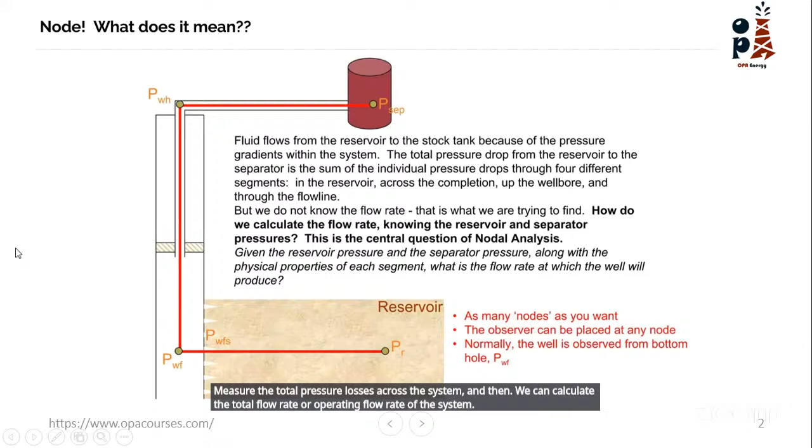So we should divide these segments in order to be able to solve our problem and calculate the total pressure losses across the system, and then we can calculate the total flow rate or operating flow rate of the system. So basically, we should first start with the inflow performance relationship.

The inflow performance relationship represents the pressure losses across the reservoir, starting from the reservoir to the sand face or the completion. The simple equation for solving the inflow performance relationship is the Darcy equation: flow rate equals J multiplied by delta P, or the drawdown. The drawdown is the reservoir pressure minus the bottom hole flowing pressure.

And J, of course, is the productivity index, and it depends on a lot of factors like formation permeability, skin factor, wellbore radius and drainage radius, the viscosity of the fluid you are flowing, and the net pay thickness.

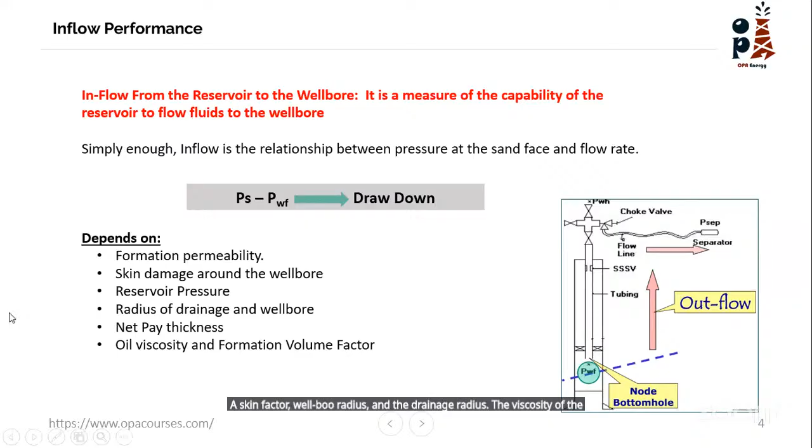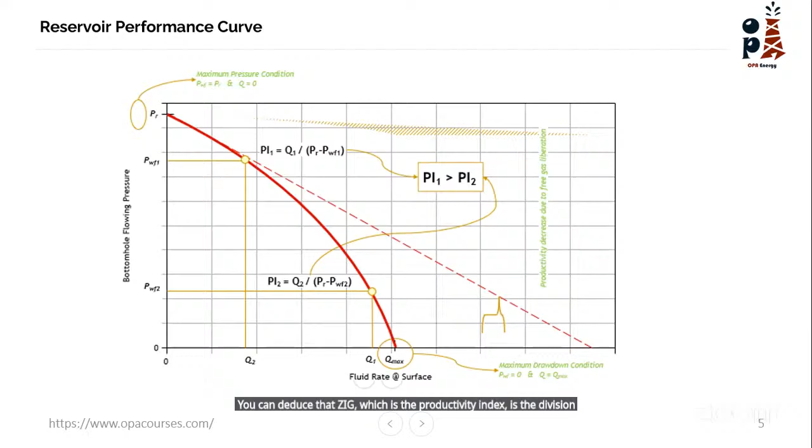And from this graph, using the normal equation of the straight line IPR, you can deduce that J, the productivity index, is -1 divided by the slope of this curve.

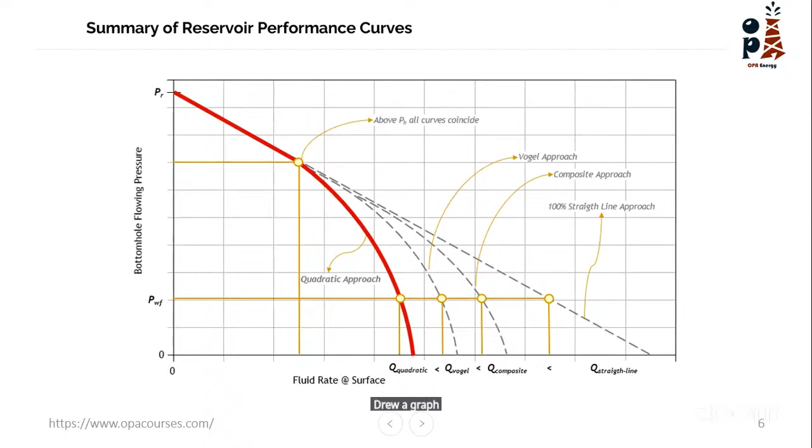These are different kinds of inflow performance relationship depending on the fluid you are producing: whether it is water, single phase or two phase, whether you are producing gas or not, whether you are above the bubble point pressure of the fluid or below it. So depending on all of that, you can draw a chart for your inflow performance relationship. And this is a chart showing you when to use different kinds of IPR method, and I can share it with you after this webinar.

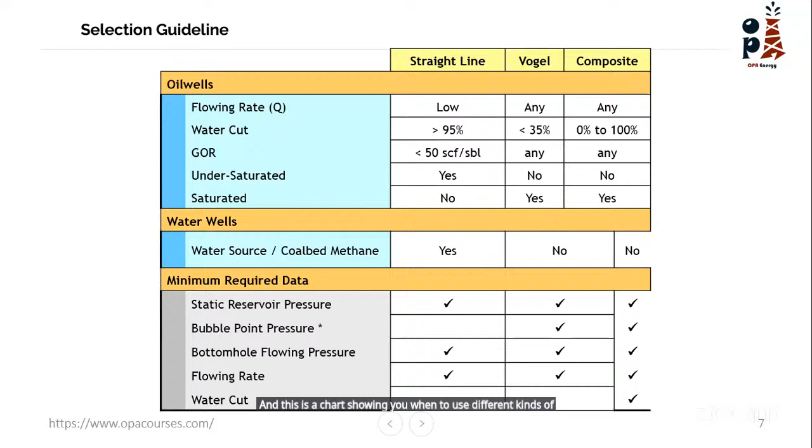Moving to the second segment of our webinar, which is the vertical lift performance or outflow performance. It represents basically the flow starting from the PWF point up to the wellhead or up to the separator, depending on the end of the branch you are simulating against.

And as you know, there are different kinds of flow regimes when you are producing single phase or multi-phase fluid, because we normally don't produce oil only, but we produce water accompanying oil and some gases when flowing below the bubble point pressure.

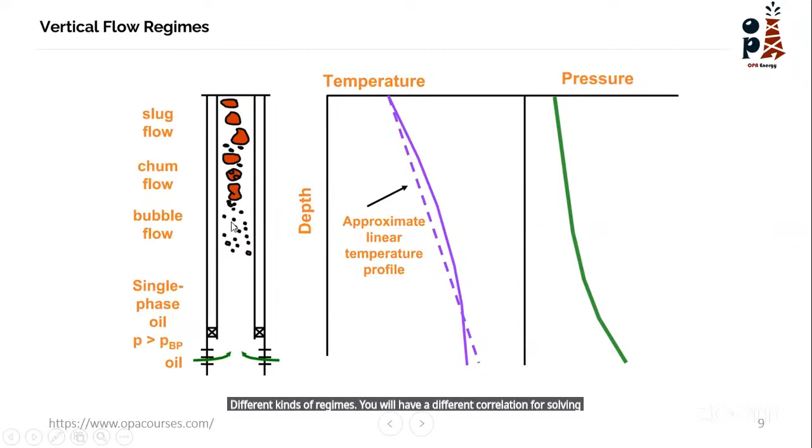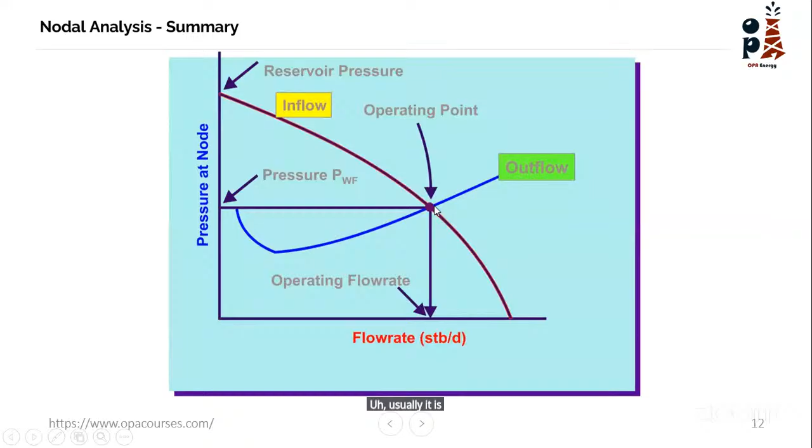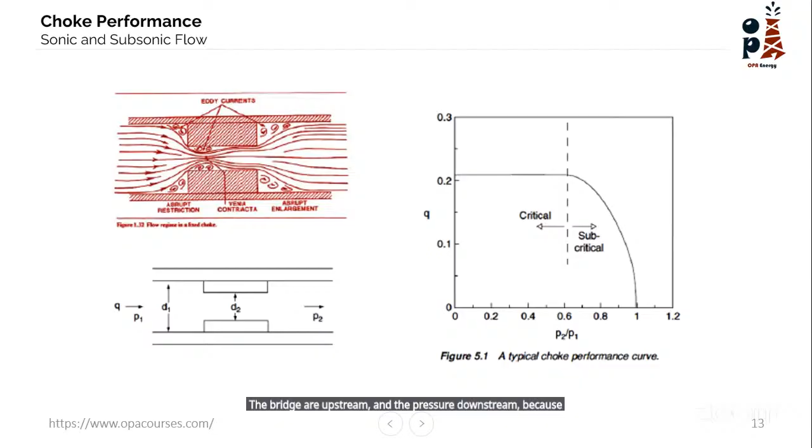This also is the choke performance. As I told you, you can choose your endpoint as the wellhead, or choose your endpoint as the separator or the downstream point. In this case, there is another node which is the choke, after which and before which there is a difference between the flow rates and the pressure upstream and the pressure downstream, because major pressure losses happen across this choke.

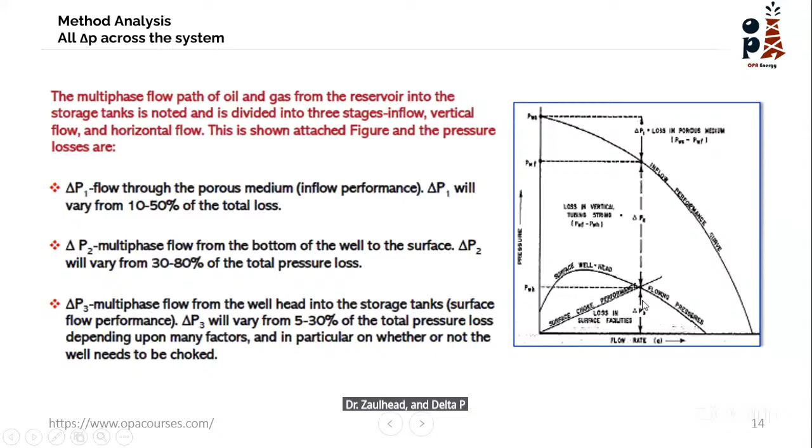So this is the total graph that represents the system you are producing at. Delta P1 is representing the pressure losses across the reservoir. Delta P2 represents the pressure losses across the tubing and up to the wellhead. And delta P3 represents the pressure losses up to the separator.

Okay, let's have a look now at Prosper and see how we can model a basic oil well. Okay, let's open Prosper. This is a portable version of Prosper. Everyone can use it at any time without installing or setting it up on the PC. Having a look first on Prosper, we have 6 main...

Excuse me, Engineer Omar. Sorry, I didn't share this screen. I will be sharing it right now. Okay, no problem. Take your time. Okay. Now everyone can see the screen of Prosper.

Yes. Okay. Having a quick look on Prosper, we have 6 main windows. The upper left one representing the option summary or the intro of your well. To the right, there is a PVT input data, and the upper right one is the IPR data. Below here is the equipment data, and to the right, this is the analysis summary, and this lower right one is an intro or some information about your Prosper version. We usually don't use this. We just use these 5 windows.

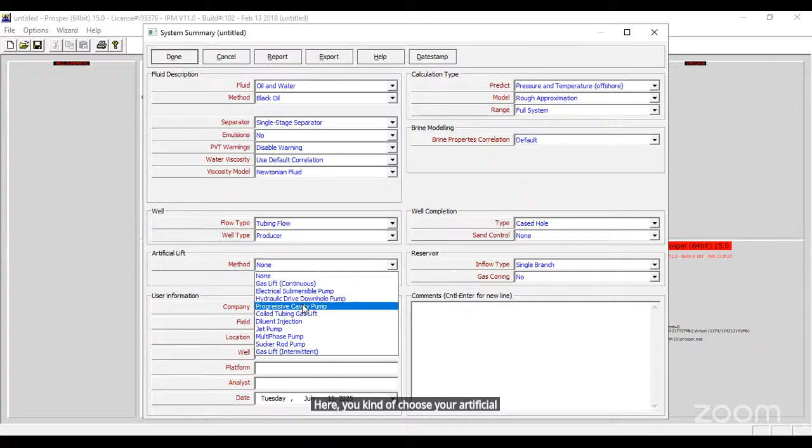Our separator, we have just a single stage separator. Emulsion, no. The viscosity model is Newtonian fluid, not non-Newtonian fluid. About the data of the well, you are flowing through the tubing, annulus, or tubing and annulus. Usually we are producing through the tubing. The well type is producer, injector, or coal bed methane producer. We are simulating a producer well. Artificial lift, here you can choose your artificial lift method, but in our case, we are going to use none, as we are going to simulate a natural flow well.

Calculation type, we are simulating offshore well or onshore well. Let's choose on land or onshore well. The model will be rough approximation. We are not including or involving enthalpy balance inside our simulation. We are simulating the full system, of course, starting from the reservoir up to the separator. Let's keep the brine modeling as default.

Well completion, here you can choose your completion. You are producing through a cased hole well or an open hole section. We are producing, in our case, through a cased hole section. The reservoir, you are producing from a single branch or multilateral well. In our case, we are producing through just a single branch. No gas coning is involved in our simulation.

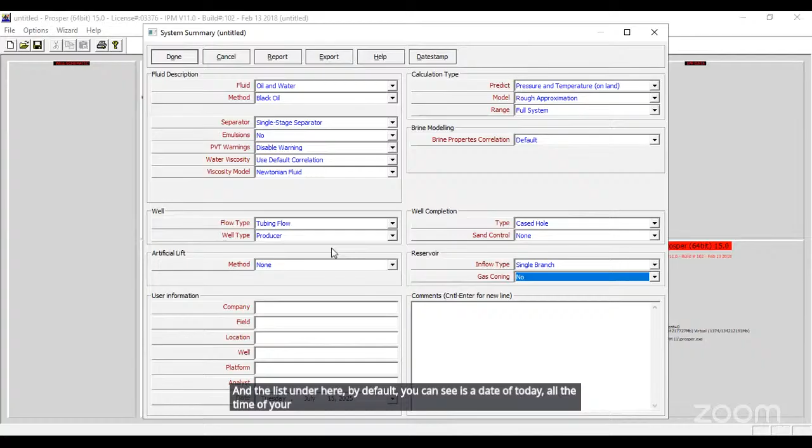If you are going to export a report about this model, you can enter your user information here, your company, field, location, well, and your name as an analyst. And here, by default, you can see the date of today or the time of your modeling. After entering all this data, you can click on Done.

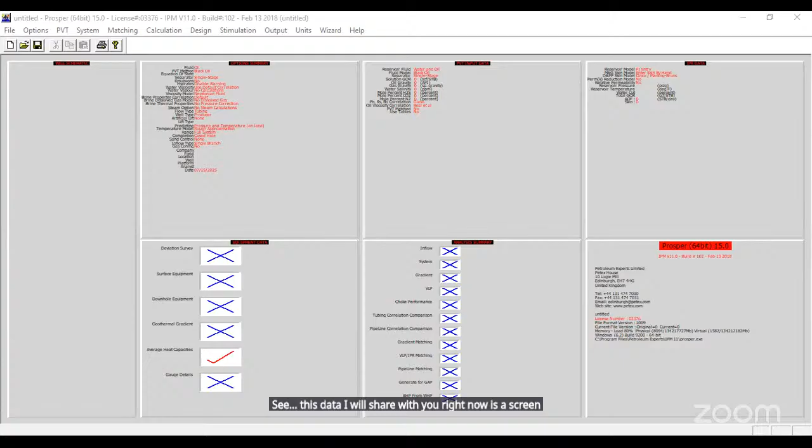Okay, I usually prefer to go to this equipment section as it shows in front of you right now. Let's double click on the equipment data. And before going through this, I have some input data to share with you. I will open an Excel sheet of an actual well. Let's see this data. I will share with you right now the screen of the Excel file in which the data of this basic well model is represented. Okay.

Have a look now on this sheet of the well model that we are going to simulate. Here is the survey of the well. This is the PVT data: the GOR, the oil gravity, the gas gravity, and the water salinity. This is the IPR data: the type of the calculations you are going to choose, the productivity index, reservoir pressure, reservoir temperature, water cut, and total GOR.

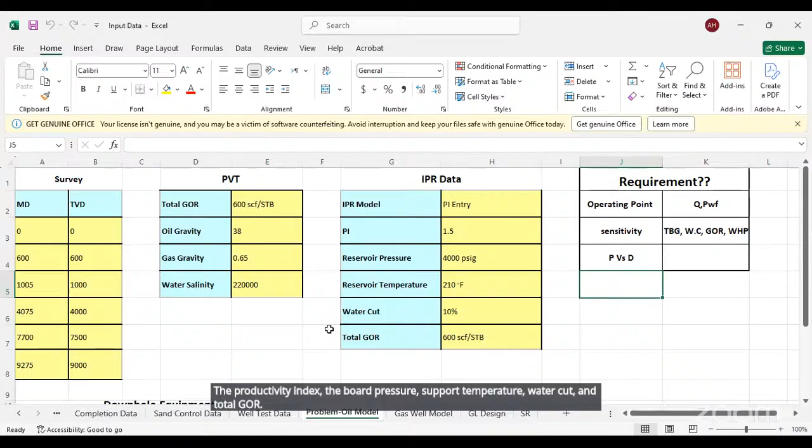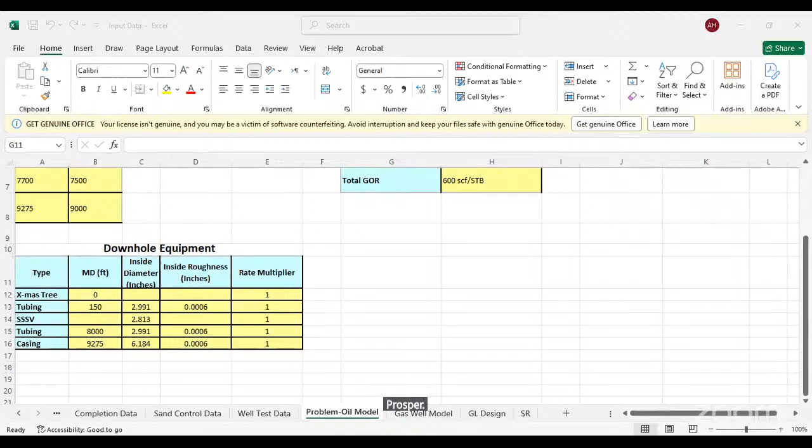And this is the downhole equipment, number of tubulars you are using, and the casing size. So let's first go step by step to our model. I will return back to Prosper. Okay, if you double click on equipment data, here you have 6 sections below the equipment data. First of all is the deviation survey.

Click on this square shape beside it. It will open for you this window in which you can enter your data, and you can realize that we have just 20 rows for entering the data. If you have a lot of rows inside your survey, you can use this filter button at which you can enter all the survey data and filter on it for the program to choose just the 20 points to represent your well.

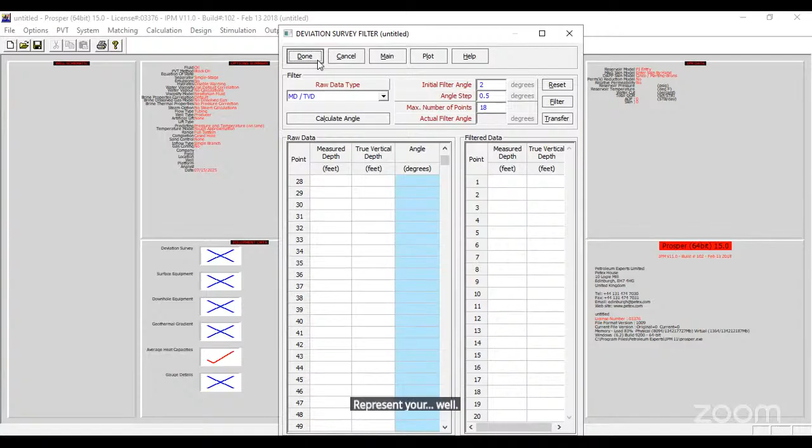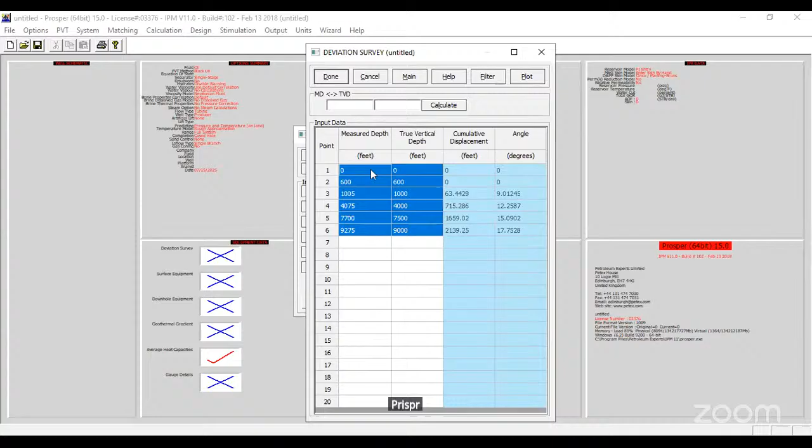But in our case, we have lower than 20 rows. I will take them from the Excel sheet you have just had a look on. I will copy and paste the cells inside Prosper, and then you can realize that the program calculated the angle and the displacement of the well. After that, you can click on Done. Here you have entered the deviation survey.

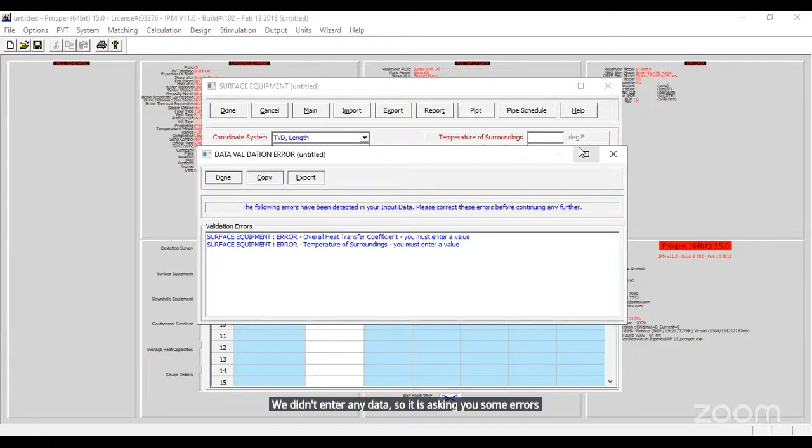The second one is the surface equipment. In our case, we will be simulating a well at the wellhead. We don't use right now a choke. We don't need to make choke performance right now. So this section we will skip for now. We didn't enter any data, so it is giving you some errors: you didn't enter the data. So we will click on Done, and then cancel.

Okay, let's go to the downhole equipment. Here you are starting from the Christmas tree. Depth is 0. From this drop down list you can choose. We have a tubing at 150, and its inside diameter is a 3 1/2 tubing. So this measured depth is 150, and its inside diameter is the inside diameter of the 3 1/2 inch tubing, which is 2.99. And the tubing inside roughness is by default.

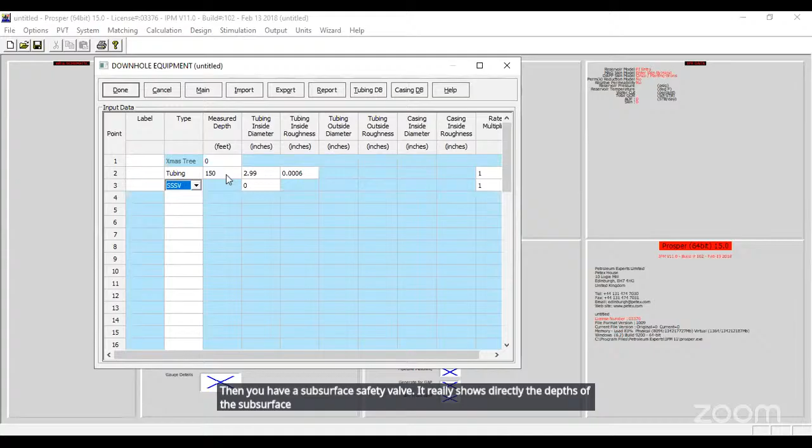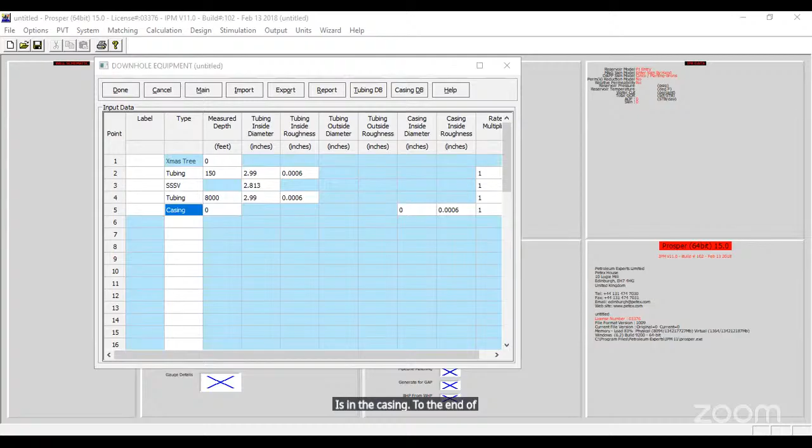Then you have a subsurface safety valve. It will choose directly the depth of the subsurface valve as the end of this tubing. Its inside diameter would be 2.813 inch. After that, we have still tubing to 8,000 feet, and its inside diameter is still the same, 2.99. Then the casing to the end of the well, which we have entered inside the deviation survey, which was 9,275.

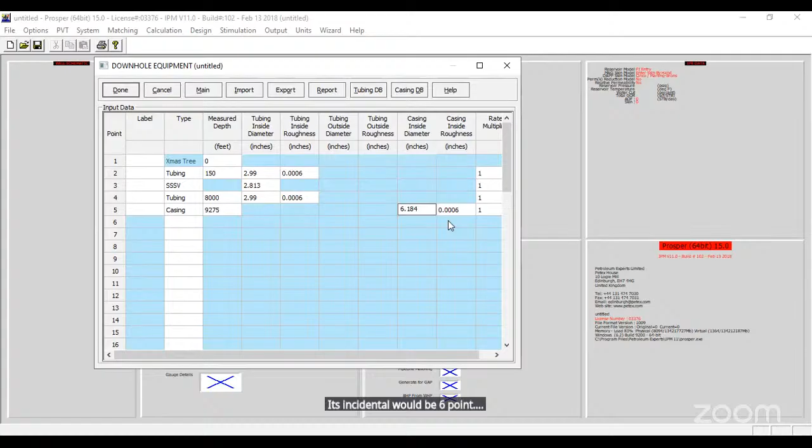It will be asking you the inside diameter of the casing, and let's assume it is a 7-inch casing, so its inside diameter would be 6.184. Now we have entered all the data regarding the downhole equipment. Let's click done.

Going to the geothermal gradient. Now we should enter the geothermal gradient, the tubing head temperature or the surface temperature. Let's choose at surface, at zero measured depth, your temperature will be 60 degrees Fahrenheit, and then at the end...

Excuse me, John. Sorry for interrupting you, but if you could share the Excel in the Zoom chat right now, because some people are asking for it so that they can practice with you, it would be perfect. If it's not ready now, it's okay, we can share it after the webinar. Okay, I can share it through the chat. Yes, Zoom chat. Okay, I will take it right now. Just a few seconds, I will be sharing with you. Okay, now it is shared in your chat. Anyone can open it. Yes, we received it. Thank you.

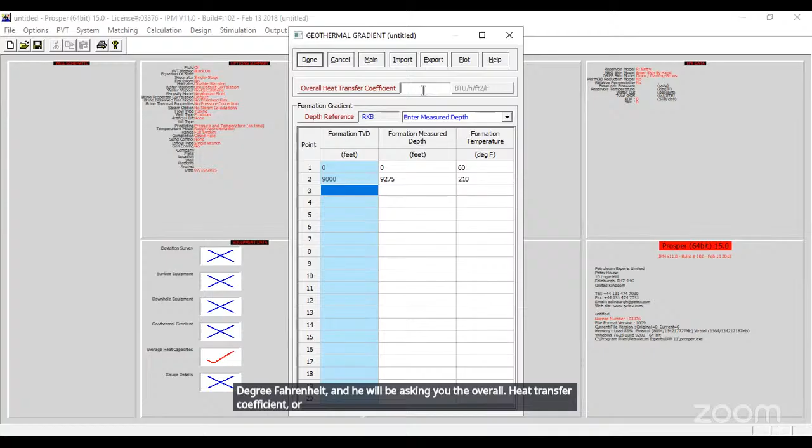Okay, thank you. Let's move back to the geothermal gradient. At zero depth we have 60 degrees Fahrenheit; at the depth of the casing or the reservoir depth it is 210 degrees Fahrenheit, and it will be asking you the overall heat transfer coefficient, or U in other softwares. Usually with oil models, we choose it to be 8, and then you can click on done after you have entered the geothermal gradient. Average heat capacities here are entered by default inside Prosper, and we'll click done.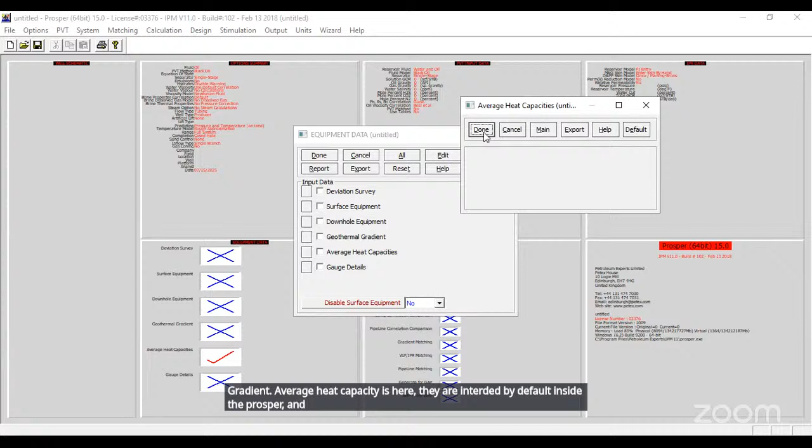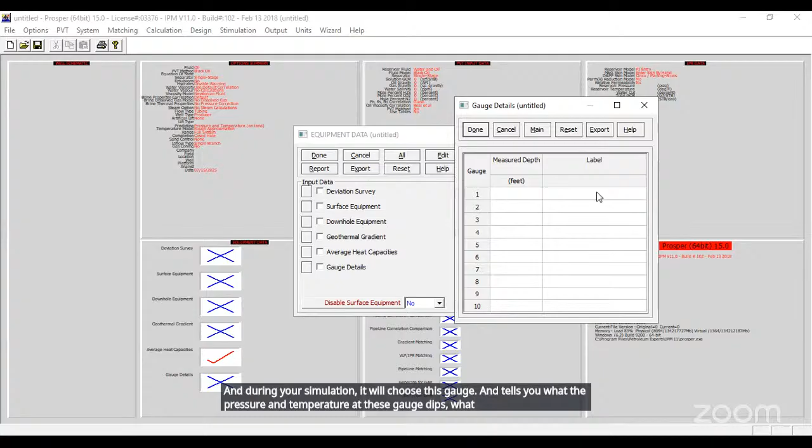Gauge details: this section is for if you are using a gauge inside your completion and you know its measured depth. It will put a label on this gauge, and during your simulation it will tell you what the pressure and temperature are at this gauge depth. So it will be a label for you. Usually we use this for matching cases between the actual wells and the Prosper simulation.

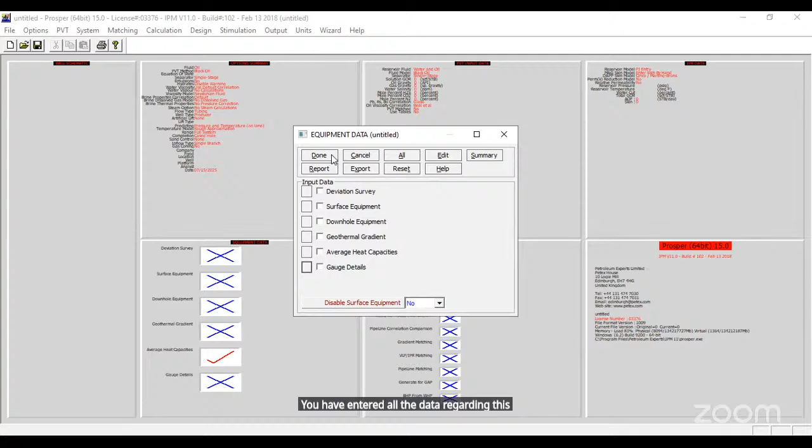So in this case, we don't have a gauge right now, so we will click on done. You have entered all the data regarding this equipment data. After that, you can click on done.

From the data I have, it shows the solution gas oil ratio, or the total gas oil ratio inside this well or this reservoir, will be 600. The oil gravity is 38 API degrees. And the gas gravity is 0.65. The water salinity is 230,000. We don't have any H2S, CO2, or N2.

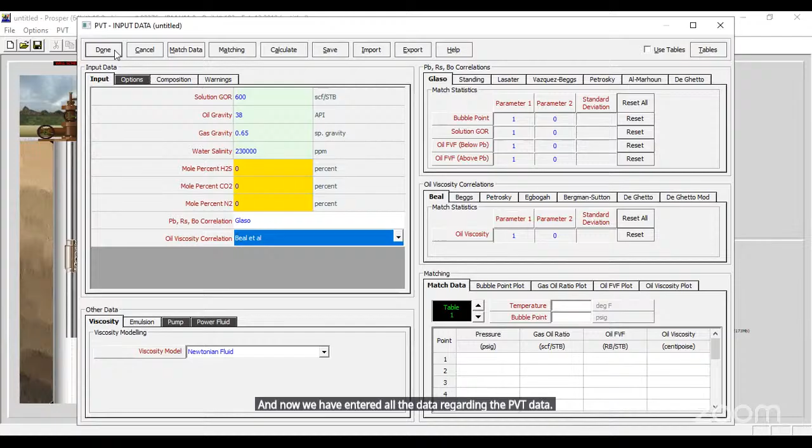Let's keep the default correlation that the software is using for calculating the bubble point and the viscosity. And now we have entered all the data regarding the PVT data. Now we can click on done. Now the PVT data is entered, and let's move now to the IPR section.

Here to the left, you can choose whatever correlation you need to use to solve your model. PI entry: if you know the productivity index of the well, you can enter the productivity index directly. Using Vogel will show you another window. Here, the software needs a test rate and a bottom hole pressure.

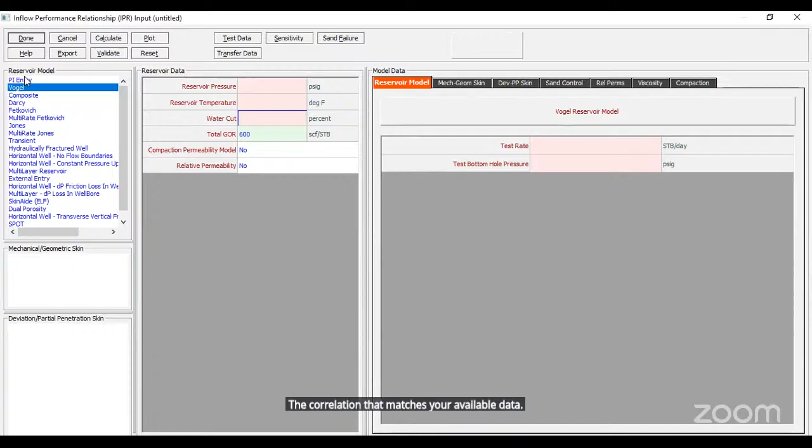And of course, all these correlations depend on many factors. First of all, the reservoir you are producing. And secondly, the available data with you. You should choose the correlation that matches your available data. Let's choose in our case the PI entry model because we know the productivity index, which from the Excel sheet is 1.5.

The reservoir pressure was 4,000 psi, temperature 210 degrees Fahrenheit, and water cut, let's assume the water cut is 10%. The total GOR is by default taken from the PVT data. Here the program has understood the total GOR and just taken it from the PVT data. Okay, now we are ready with the IPR data.

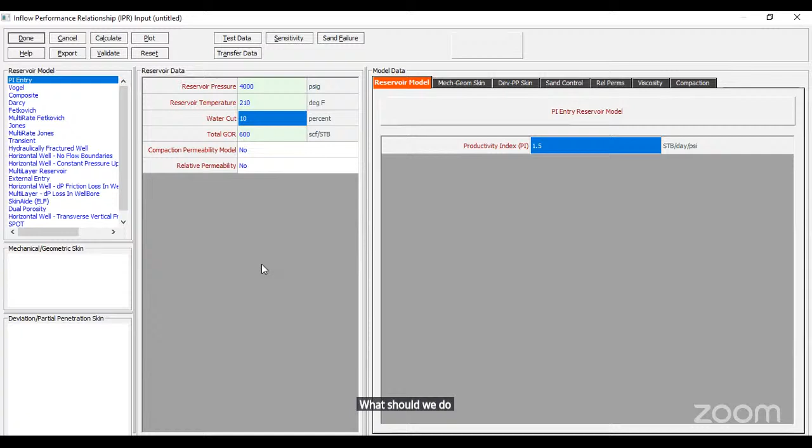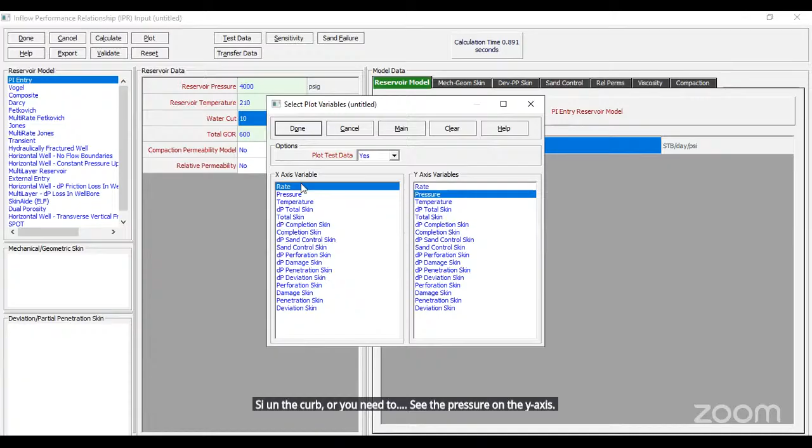What should we do now? We should now calculate the IPR data and see the inflow performance relationship. Now we should click on calculate. Clicking on calculate, it will calculate for you the IPR curve for the well. Let's click on plot results to see the shape of the IPR. It will ask you what you want to see on the curve. I need to see the pressure on the y-axis, and on the x-axis I need to see the flow rate. And then click on done.

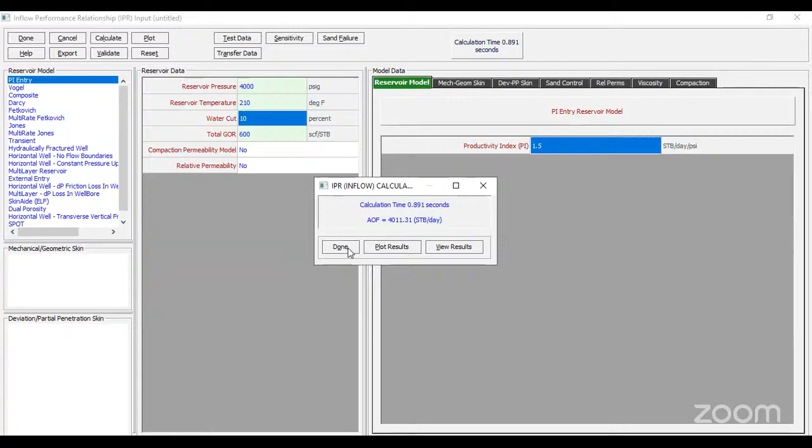Okay. Now, of course, the intercept with the y-axis is the reservoir pressure, as we all know. If you are producing at zero flow rate, the PWF is equal to the reservoir pressure, which is 4,000 psi in our case. Okay, let's click on finish and done. Okay, done.

You can see that your IPR curve right now is represented on this right window. Okay, what we have done till now: we have entered the options summary, we have entered the PVT data, we have entered the equipment data, and we have entered the IPR data and drawn the IPR curve. Now we need to simulate the vertical lift performance and do some sensitivity analysis on the system to know how the well will be flowing with different cases.

So let's go to calculations, system IPR plus VLP, and click on it. Okay, here it has opened this window and the software will be asking you, you need to produce this well. So I will simulate for you what is the flow rate you are going to produce and what is the PWF or solution node pressure you will be producing with.

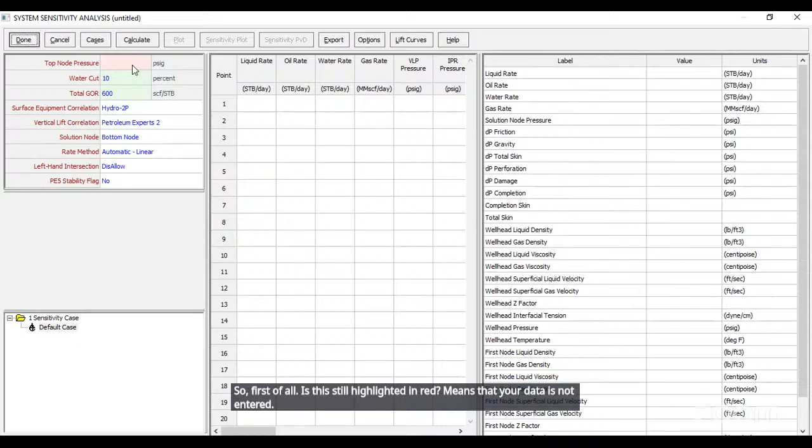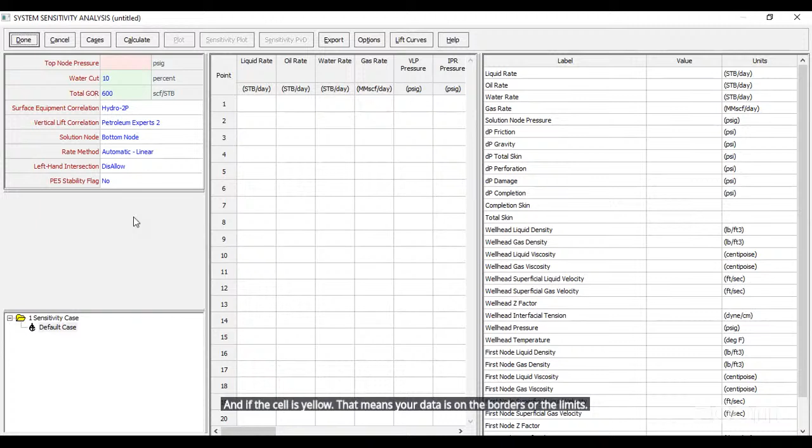So first of all, this cell highlighted in red means that your data is not entered or your data is not correct. But if they are green like this, your data is correct. And if the cell is yellow, that means your data is on the borders or the limits. So what is the wellhead pressure or top node pressure you will be producing with? For example, if your network pressure is 500 psi, the wellhead pressure for your well will be 500 psi, and let's enter this. And now we are ready to draw the VLP against the IPR.

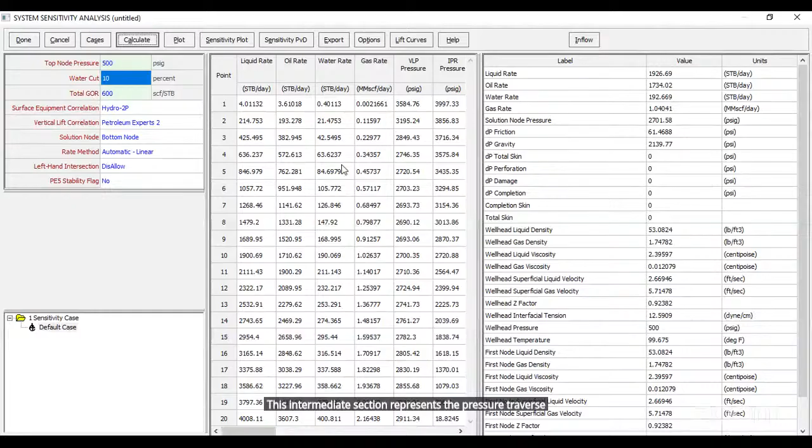Just click on calculate, show calculating data, and then the program has just calculated for you the VLP against the IPR. This intermediate section represents the pressure traverse across the different depths, different liquid rates, and the gas rate from the well, water rate, and all these data.

To the right, this is the solution point: the liquid rate you can produce from this well is around 1,900 stock tank barrels per day. The oil will be 1,700 because the water rate we have entered is 10%. The gas rate is around 1 million. The solution node pressure represents the bottom hole flowing pressure.

And I forgot to tell you something here. The program is asking you what correlations you are going to use. So in VLP, we can choose among various kinds of correlations based on your offset wells and based on the matching you have done before on other wells, where you have seen the best correlations representing your wells. So in this case, you should choose the best correlations that represent your wells. The default of Prosper is Petroleum Experts 2, so we'll fix it for the time being.

The software will be asking you what solution node you need to choose. Most often we use the bottom node, which is the PWF, to solve our problem. The rate method will be asking you if you need your curve to be linear or geometric. We will choose linear. And after that, click on calculate, and we have clicked on it. So let's move back to the right.

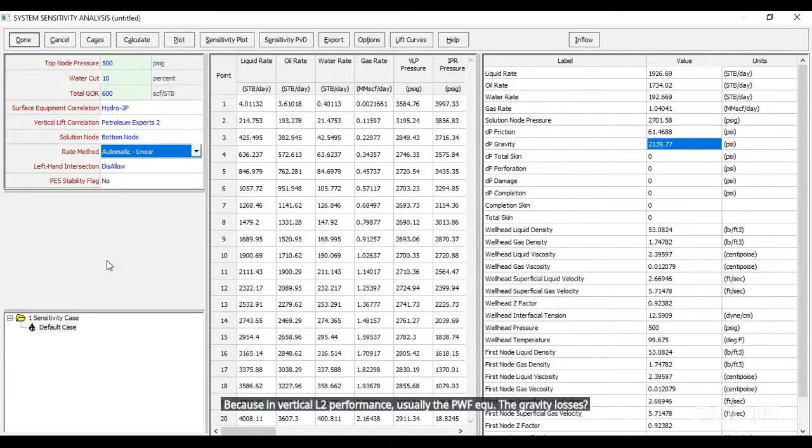The solution node pressure, which is PWF: the delta P of friction losses is around 60 psi. The losses due to gravity are 2,140 psi. And if you sum the friction losses, gravity losses and wellhead pressure, you will end up with the solution node pressure, because in vertical lift performance, usually the PWF equals the gravity losses plus friction losses plus wellhead pressure. The total skin is 0 because we didn't enter any data about the skin. No losses across the perforation, no damage.

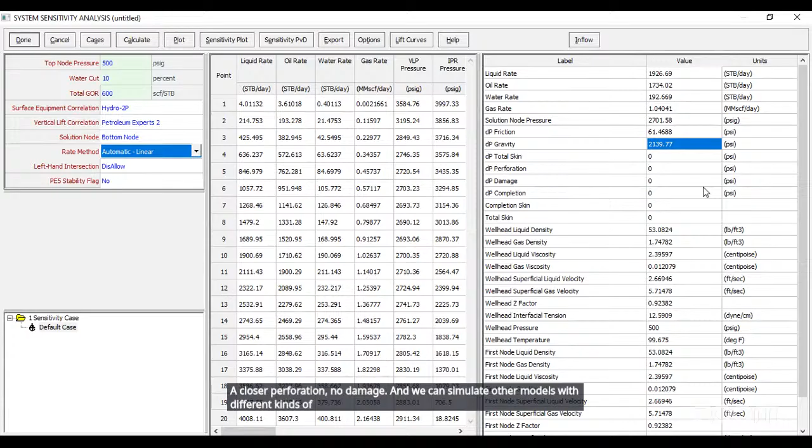And we can simulate other models with different kinds of input data to see the effect of all these parameters. And you can see a lot of data in this output table, like the wellhead liquid density, wellhead gas density, the first node pressure, which is the wellhead pressure. And you can see also the temperature at the surface, the interfacial tensions, and a lot of data.

Okay, let's plot this to see the intersection point. Click on plot, system plot, plot all cases. It will be asking you what you would like to plot. I will choose the liquid rate on the x-axis and the VLP pressure and IPR pressure on the y-axis, and then click on done.

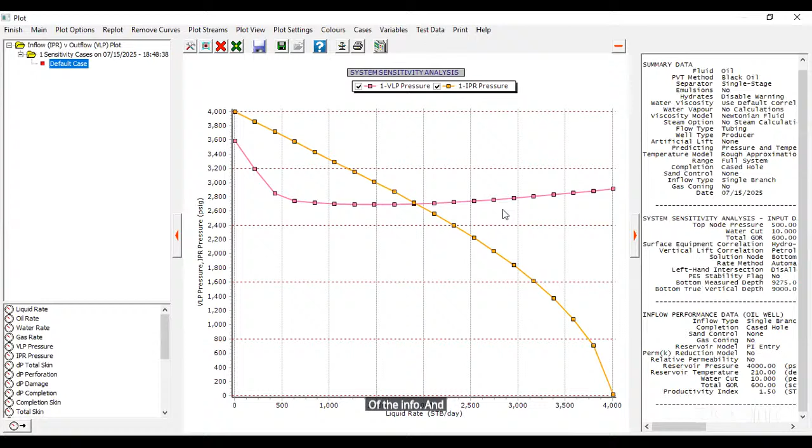Now the program has plotted the IPR curve against the VLP curve, and the intersection point here is the operating point of the well. On the right, you can see some input data of the inflow and all the data you have entered before. Okay, now we know the operating point of the well and at which rate you can produce this well.

So let's do something fun right now. We will do something called sensitivity analysis, choosing different variables and parameters, applying them as cases in this well, and see what will happen to the VLP and the IPR. Okay, so let's click on cases. It will be asking you what variable you need to change. For example, let's choose the tubing diameter.

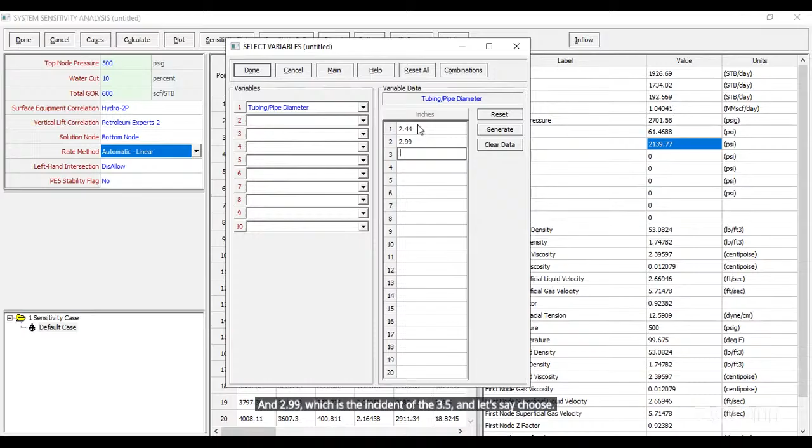The entered tubing diameter was 3 1/2 tubing. So let's see now what will happen if I am entering the 2 7/8 tubing, whose inside diameter is 2.44 inches, and 2.99, which is the inside diameter of the 3 1/2, and let's say choose 4.5 tubing, whose inside diameter is around 3.9 inches. And now let's click on done.

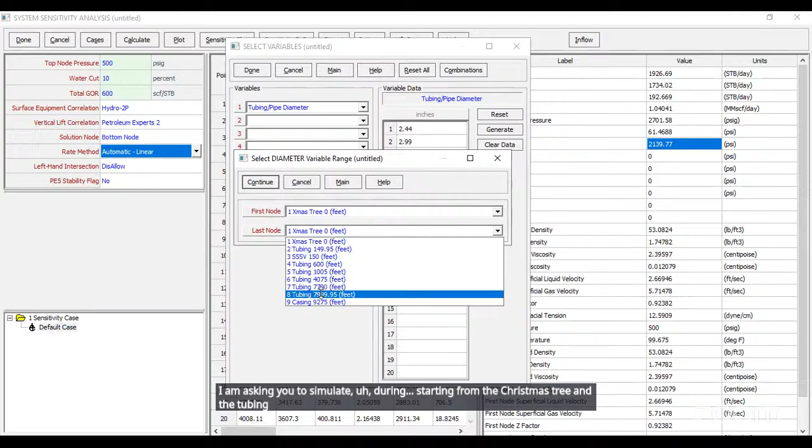We have entered now a lot of data. The program will be asking you what is the first node and what is the last node. I'm asking you to simulate the tubing starting from the Christmas tree up to the end of the tubing, and continue. Now click on calculate, show calculating data. You have now the 3 cases you have simulated.

Let's step on this 2.44. You will see the liquid rate or the operating point. Please keep in mind this figure is around 1,700. If you are using a bigger tubing inside diameter, the flow rate or operating point will be higher. And going to the 3.9, it will be even higher. So let's plot this and see.

Now you have the three cases, the same IPR with the three different tubings. This one representing the tubing 2.44, so the operating point is lower in flow rate. This one is 2.99, and this one is 3.9. So it is simulating the tubing size against the VLP. So you can see that if you are using a bigger tubing diameter, you will have a higher flow rate or operating point.

And of course, all of us know that this is not a proportional case, because you are increasing your diameter up to a limit, and then after this limit, the results will be reversed, and the operating point will be lower. So let's, for example, choose a bigger inside diameter, let's say 4.5, and then done. Continue. Calculate again. Show calculating data. Okay.

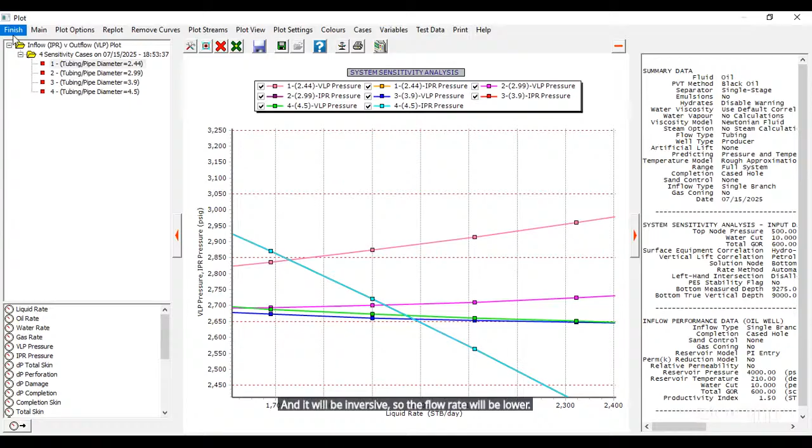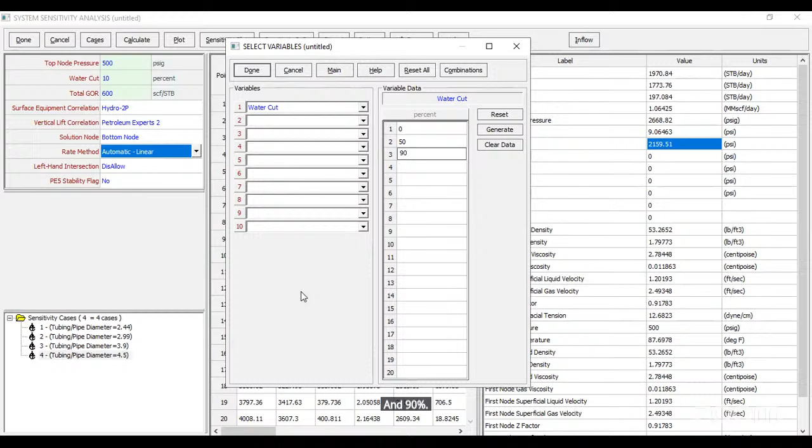For example, let's remove this case, which is the tubing diameter, and choose water cut. What will happen if you choose your water cut to be 0, then 50% and 90%? What will happen to the intersection point? Done. And then calculate. Show calculating data. And then plot your curves. All cases. Done. Okay, what happened here? This is interesting.

This is the IPR. These are the 3 VLP curves of different water cuts. You can see that only one VLP curve is intersecting the IPR, and you can produce this well at this curve, and of course, it is the 0 water cut curve. If you are producing a well with a 50% water cut, you need much higher PWF to flow your well, so your requirements are higher than the deliverability of your reservoir, and the two curves are not intersecting each other. In this case, you cannot produce your well at these parameters, and you need a supporting artificial lift method to produce your well.

The same, of course, is happening when you are producing with 90% water cut. The requirements of the system are much higher, so the VLP and the IPR curves are not intersecting, and you cannot produce your well. And someone would ask me why, if you are choosing different water cuts, the IPR is shown as 3 curves, when it should be just one curve, because if the water cut changes, supposedly there is no change inside the reservoir.

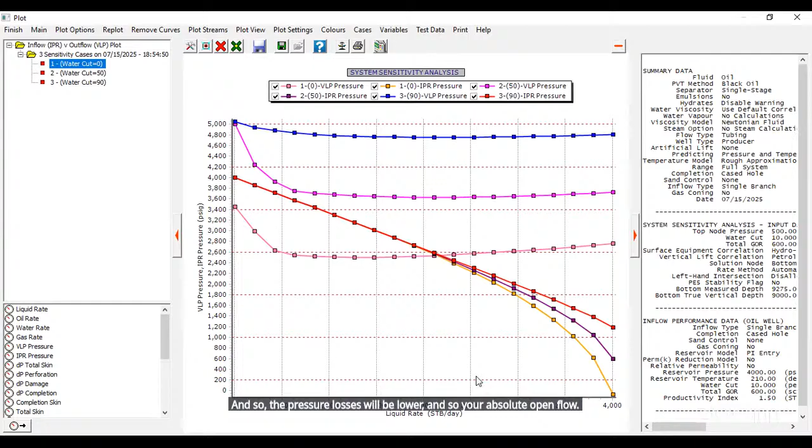But Prosper, unlike other software, to be honest with you, simulates the different water cuts and their effect on the IPR, as it considers that a higher water cut has lower gas and lower compressible fluids inside the flow. So the pressure losses will be lower, your absolute open flow will be higher, and your total pressure losses inside the reservoir are less than the normal case. So this red curve will be the higher water cut, and as you can see, its PWF, its absolute open flow, and its deliverability are bigger than the other curves, down to the zero water cut.

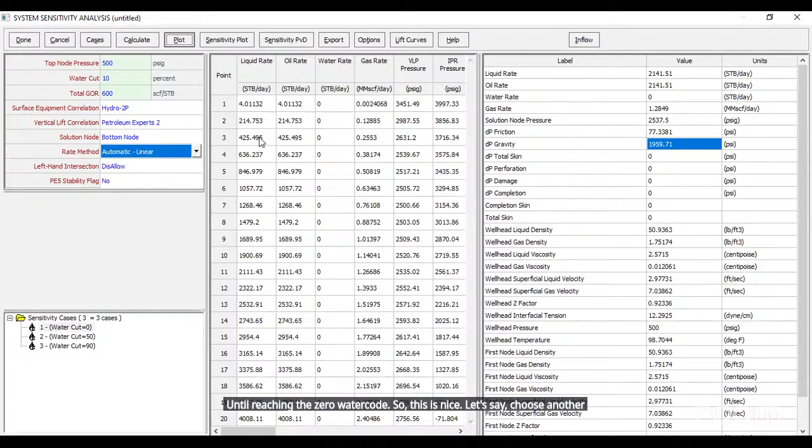So this is nice. Let's choose another case to make sensitivity on. For example, let's simulate on the productivity index, okay? Productivity index, we have chosen our case to be 1.5. Let's choose 0.5, 2, and 5, for example. Okay, click on done. Here are the cases. Calculate. Never forget to calculate, okay?

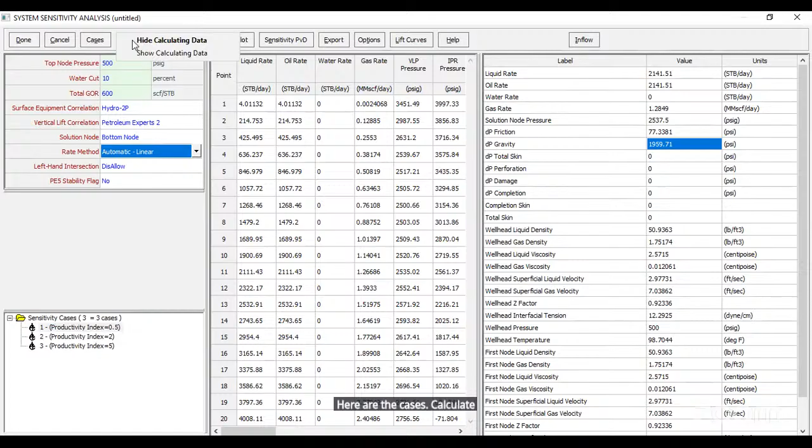Okay. If you are producing with 0.5 productivity index, your operating point is around 600 stock tank barrel per day. Producing with 2, of course, the results are much higher, 2,500. And of course, with 5, let's see what happened. You cannot produce. Let's see the plot, what it tells us.

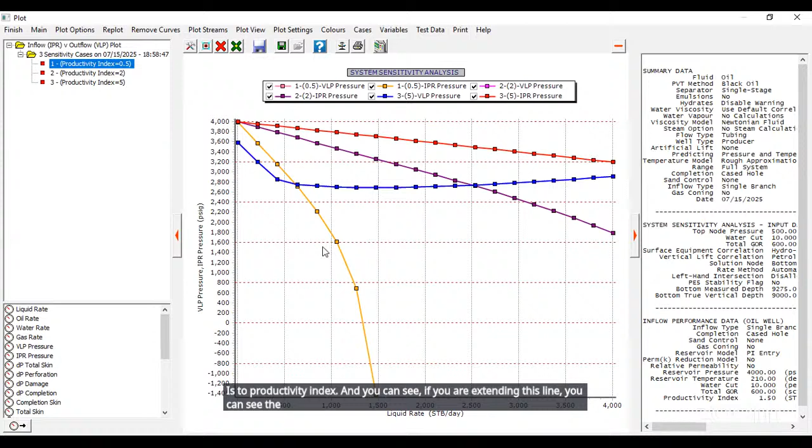It can tell you that your results are much higher than your scale or limits of the production. So you cannot produce both curves with the requirements of the VLP, or this tubing cannot handle all these amount of curves. And as you can see, there is no intersection point. So this violet curve is 2 productivity index. And if you are extending this line, you can see the absolute open flow much higher than this curve with 0.5 productivity index.

And of course, you will have this IPR, which is 5, and you have just one VLP curve because the productivity index is not affecting the VLP. So you will have just one VLP and 3 different IPRs. Click on finish.

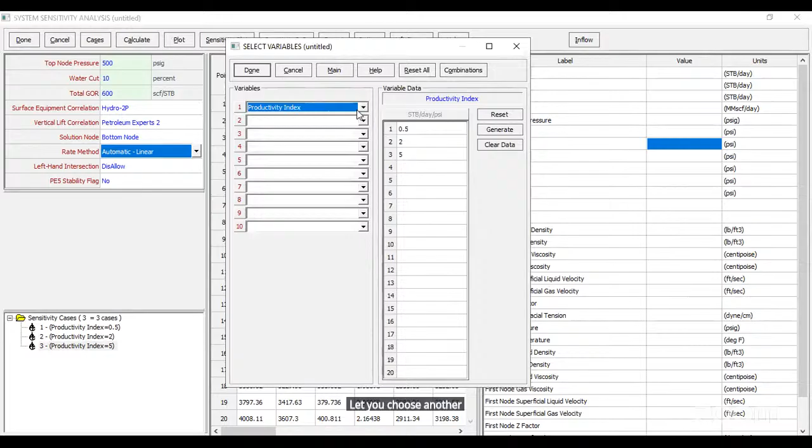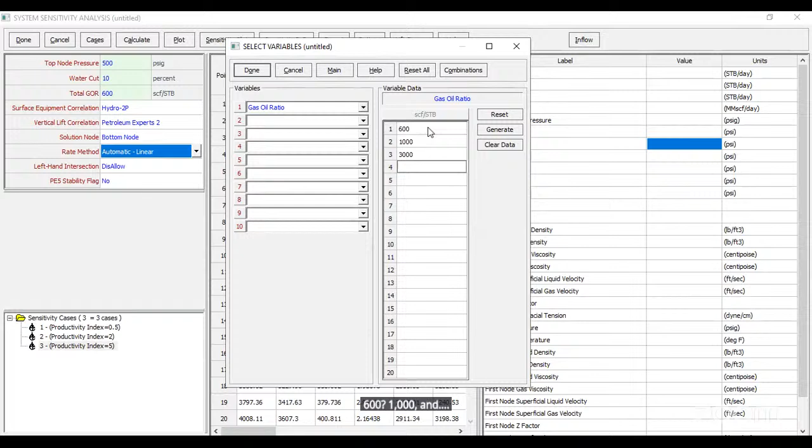Let's choose another case, which is, for example, the solution gas oil ratio. The default one in our model was 600. Let's choose it to be 600, 1,000, and 3,000, and then done. And calculate.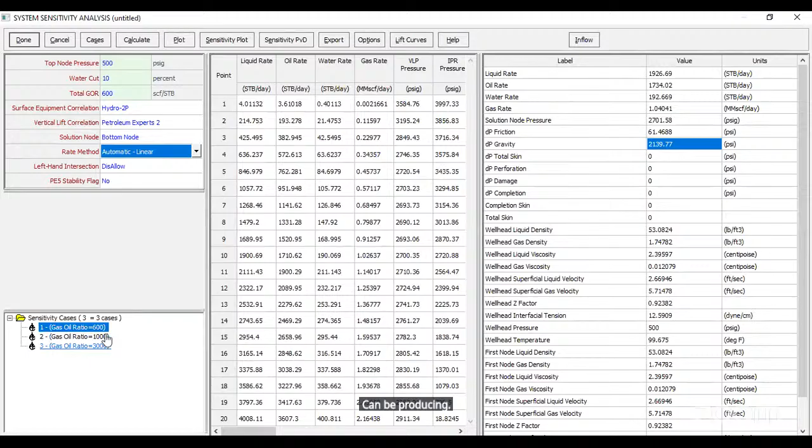Okay, at 600 SCF per stock tank barrel, you can be producing this figure. At 1,000, you will get higher flow rate, and at 3,000, you will get a higher flow rate. Let's plot this. All cases done. Okay, you can see obviously that the system has drawn 3 VLP curves and 3 different IPRs.

The reason for drawing different IPRs is the same as the water cut. Prosper considers that the change in the gas rate and the GOR and the changes in the water cut are highly affecting the IPR or the pressure losses inside the reservoir. Okay, and of course, as I have told you before, the GOR has the same phenomena of tubing.

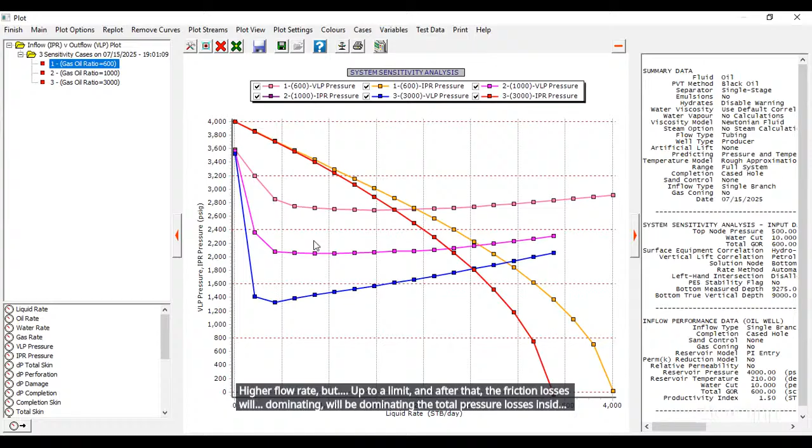You are producing to a limit with a higher GOR. I mean, if you are producing with a higher GOR, you will be producing a higher flow rate. But up to a limit, and after that, the friction losses will be dominating the total pressure losses inside your system. And after that, the results will be inversed, and you will be producing lower flow rates.

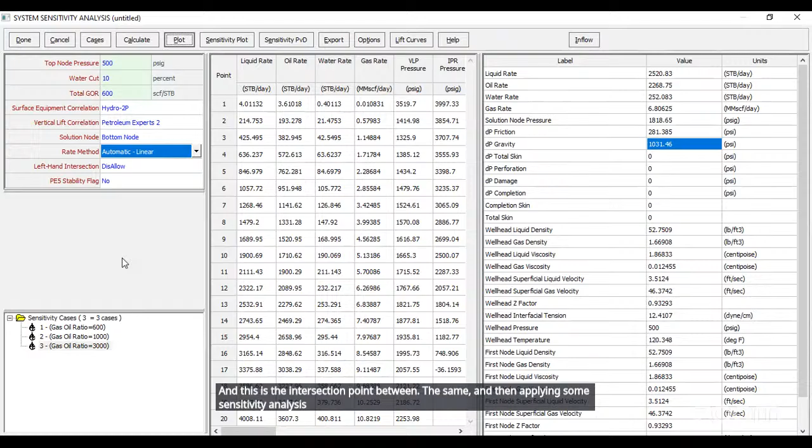Okay, this is roughly a summary of simulating an oil well, drawing the IPR, drawing the VLP, and seeing the intersection point between them, and then applying some sensitivity analysis and different variables on the system, and seeing the effect of all these variables on the operating point and the solution node pressure. This is just an intro to Prosper.

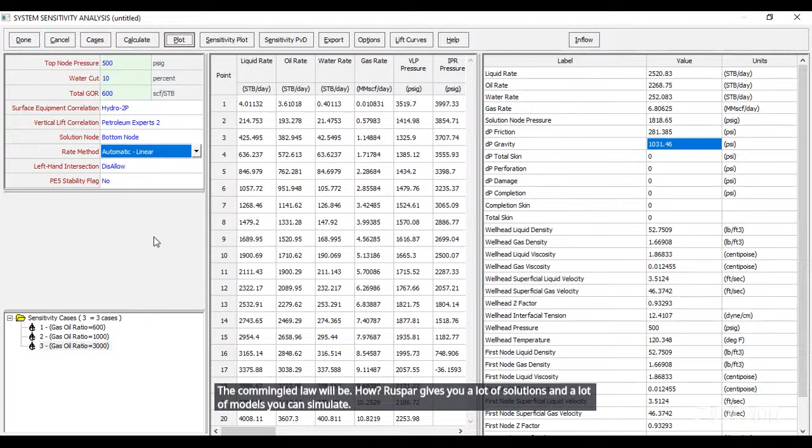Of course, in Prosper, you have a lot of models to simulate, like oil well models, gas models, different kinds of artificial lift methods. You can simulate multi-layer models. If you have different perforations with different depths, you can enter them in the model, simulate this, and see how the commingled flow will be. Prosper gives you a lot of solutions and models you can simulate with a lot of correlations for the IPR and VLP and for the choke performance. You can simulate all your system and take all the data.

And of course, you can do match cases to compare between the simulation results and the actual results. And after that, you can do some adjusting for the entered data and choose the best correlations that represent your actual data. And after that, you can apply it to the other well modeling inside your field or the offset wells. This is for now.

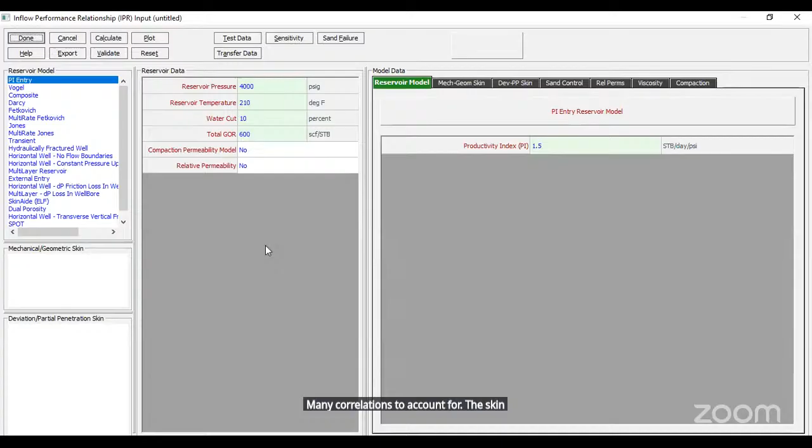Okay, thank you. We have another question from Lala. Can you talk about skin? Okay, in Prosper, what I have explained for you today was just an intro to an oil model. But of course, Prosper has many correlations to account for the skin. For example, let's see from these correlations. Let's choose, for example, Darcy.

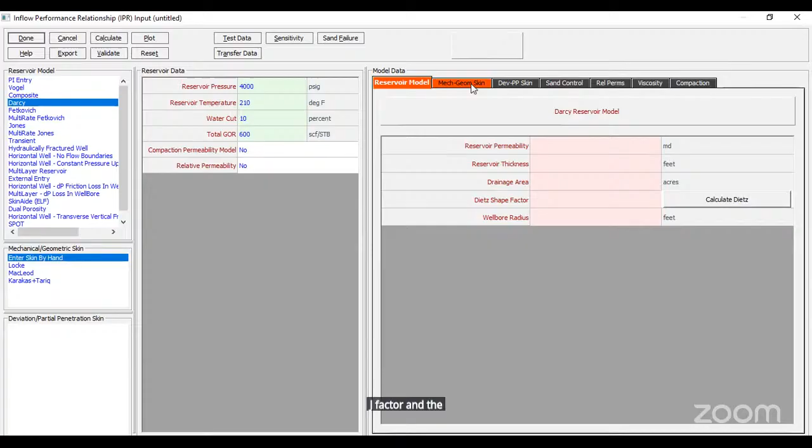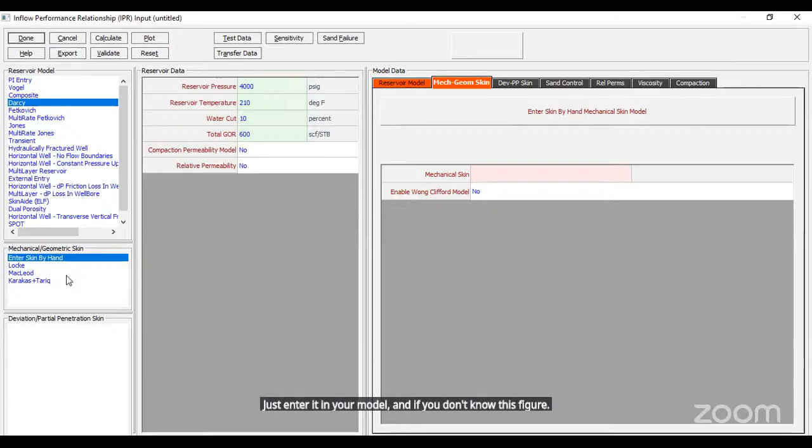In Darcy, he will be asking you more data to enter, like the reservoir model. He will be asking you the reservoir permeability, thickness, drainage area, shape factor, and well radius. And in this section of the mechanical/geometric skin, it will be asking you the mechanical skin. If you know the exact figure from the drawdown and build-up tests, you can just enter it in your model. And if you don't know this figure exactly, you can simulate it by different techniques.

For example, on this left, you can choose enter skin by hand or use Karakas and Tariq method, and it will open for you another window to enter the data you have about the perforation and the deviation and the invaded zone, crushed zone, and a lot of the data. And of course, this needs much more time to talk about. It will not be finished in one session, but I can tell you honestly that Prosper can simulate all of this. If you have all the data, it can simulate for you the actual theoretical data of your well.

Okay, thank you. Another question. Let's assume that we acidize the well. Can I assume that the skin will be equal to zero? If we make an acidization, can we assume the skin to be zero or not? Okay. Usually the skin is zero for a virgin well. Usually, as we know, the skin value ranges from negative value to zero to positive value. The negative value means that your well is stimulated and you have higher permeability and higher productivity index

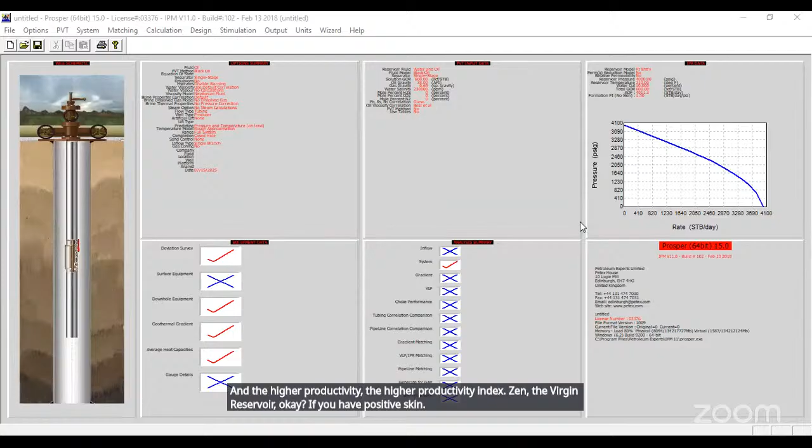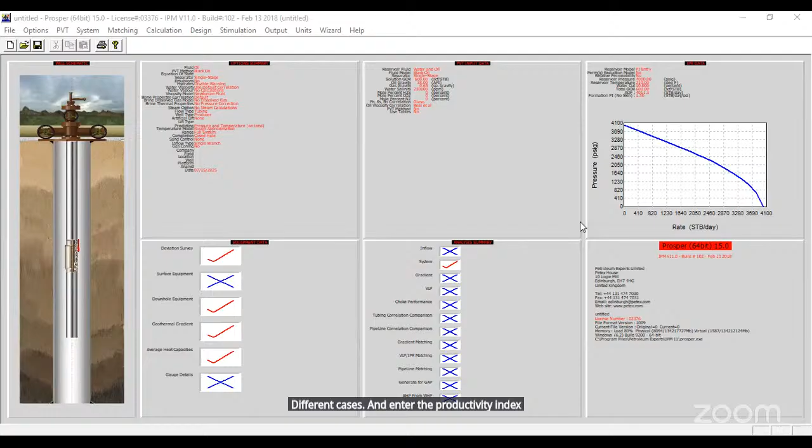than the virgin reservoir. Okay, if you have positive skin, resulting from the perforation, the brine or completion fluid, in this case your skin will be positive, and we assume that zero is for a virgin reservoir. So after stimulation with acidizing or with hydraulic fracturing, you can see that your skin will be negative. And if you know the productivity index, we can do sensitivity analysis in different cases, enter the productivity index, and see the changes in the flow rates and the flowability of the well.

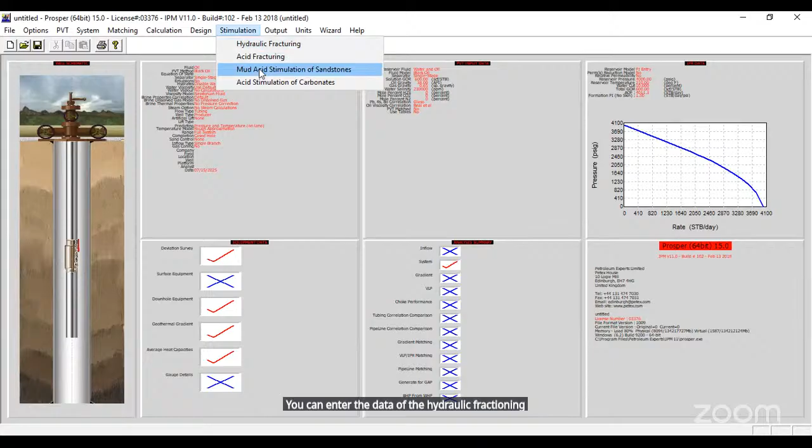Another thing is that you can see from here, you have a dedicated tab for stimulation. You can enter the data of the hydraulic fracturing or acid stimulation and then simulate on them and see the output data of the software. Okay, someone is asking, in our case, was the SSSV subsurface safety valve located at 150 or not? 150, yes. Okay.

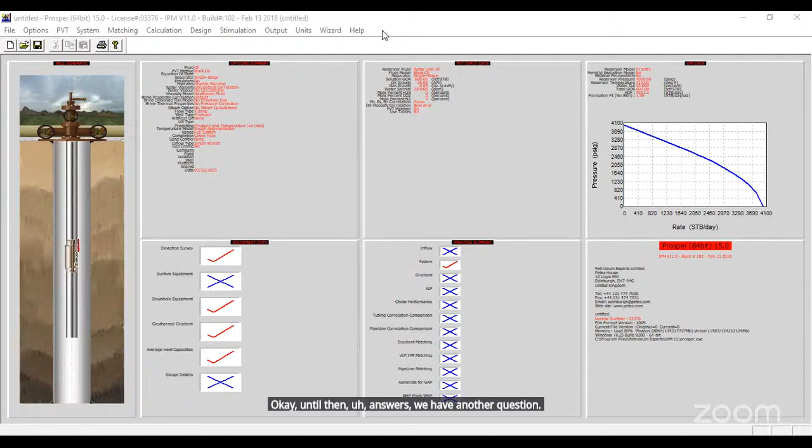So any more questions? Please, Zidane, can you elaborate what do you mean by this parameter is the same for cased or open hole? Which parameter? Do you mean the skin? Okay, until Zidane answers, we have another question. Which stimulation techniques can lead to negative skin factor? All the stimulation techniques, if they are done properly, can lead to a negative skin factor. Okay, so any more questions?